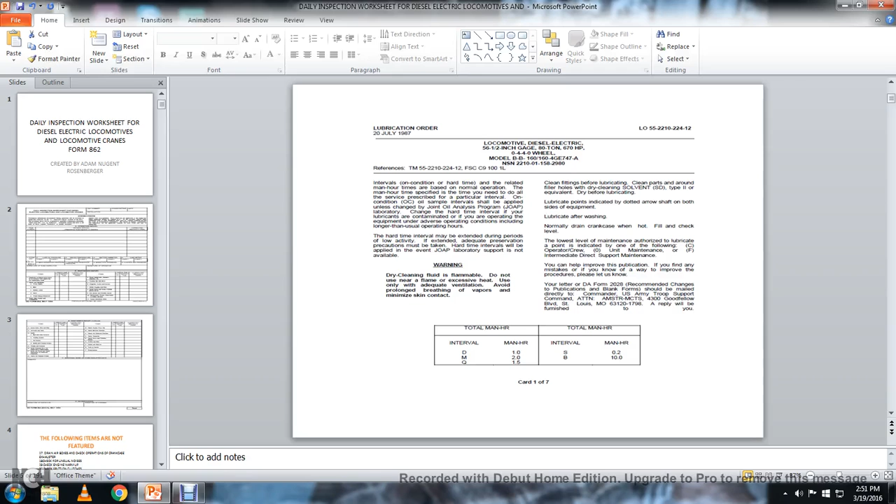This is a video for how to fill out a daily inspection worksheet for diesel electric locomotives and locomotive cranes, form 862. It covers the locomotive brake test, initial.

A 16 part process, a straight air brake test, and then some assembly drawings of the different items.

The daily inspection locomotive form has items: repairs needed, operator report, corrected, cleaned (yes or no), lube oil pressure number 1 and number 2, water temperature number 1 and number 2, battery ammeter number 1 and 2, load meter 1 and 2, main reservoir air pressure, equalizing reservoir pressure, brake pipe pressure, control air pressure, signature of road inspector, signature of operator.

Item 1 is lubrication complete, lubricating in accordance with the applicable DA lubrication order.

Number 2 is check and replenish water supply, fuel, battery, water, sand, and wheel flange lubricator, horns, bells, lights, and windshield, brake equipment, sanders and shutters, etc., cooling fan, couplers, locks, levers, brake rigging, pins, brake shoes, brake cylinders, piston travel, cab heater, standby heater.

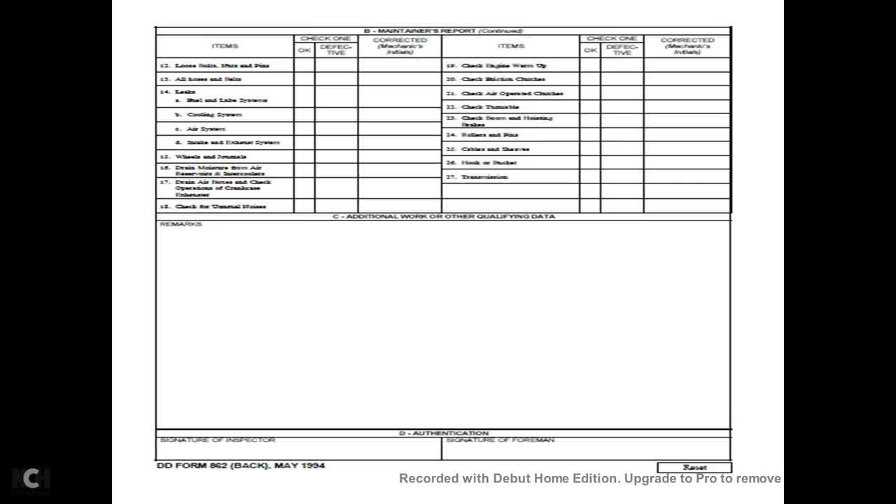Then over here are the more crane-specific items that I didn't do, such as check engine warm up, friction clutches, air operated clutches, turntable, boom, hoisting, rollers and pins and cables and sheaves and hooks and bucket and transmission for railroad crane.

Like I said, this is the daily inspection worksheet for diesel electric locomotives and locomotive cranes.

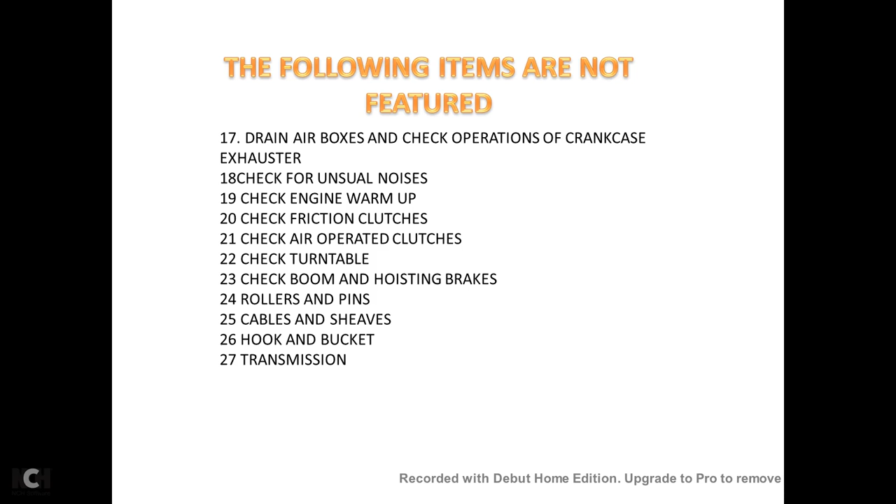Intervals are based on condition, hard time, and related man hours, based on normal operation of the hours specified, giving the time needed to do all prescribed particular intervals.

On condition, oil sample intervals are applied unless changed by the joint oil analysis program laboratory. Change hard time intervals if the lubricants are contaminated, or if operating the equipment under adverse operating conditions, including longer than usual operation hours.

The hard time interval may be exceeded during periods of low activity, and extended adequate preservation precautions must be taken. Hard time intervals will be applied when joint oil analysis program laboratory support is not available.

Warning: dry cleaning fluid is flammable. Do not use near a flame or excessive heat; use only with adequate ventilation. Avoid prolonged breathing of vapors and minimize skin contact.

Clean the fittings before lubricating, clean the parts around the filler holes with dry cleaning solvent type 2 or equivalent, and dry before lubricating.

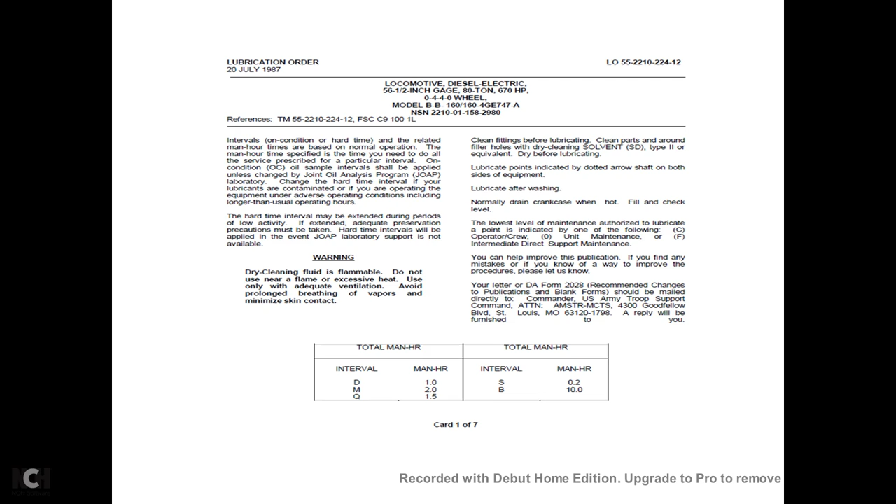D is 1.0 hours, M is 2.0 hours, Q is 1.5, S is two tenths of an hour, and B is 10 hours.

Starting with the engine oil dipstick and gauge, you check and maintain the high level for the first and check one each engine dipstick for each engine marked. The engine crankcase filler case is also shown on the OE/HDO. Add oil as needed to maintain the high level mark.

Number 3, the lower part says engine crankcase drain, one each engine. Open the drain valve and drain the oil. See notes 3, 4, and 5.

Engine oil filters, or drains and strainers. Oil filter replacement interval shall align with the condition of the joint oil analysis program, or hard time oil change requirements. See notes 4 and 5.

At the oil change, drain and clean the engine lube oil filters, strainer housing, sump pans, and interior crankcase, drain and dry parts, replace filter elements, replenish the oil supply with approximately 10.5 gallons of engine oil. OE/HDO, fill to the high level mark on the dipstick. Check the engine oil filters, valve covers, and filter strainer housing seals for tightness, start and run engines, replenishing oil supply to the high level mark.

Engine oil: a sample of the oil shall be sent to the Joint Oil Analysis Program for analysis at an interval of 25 hours or 30 days. Refer to AR 700-132 for sampling requirements of the Joint Oil Analysis Program.

JOAP Laboratory Support. If support is not available, drain and refill crankcase oil at every 500 hours.

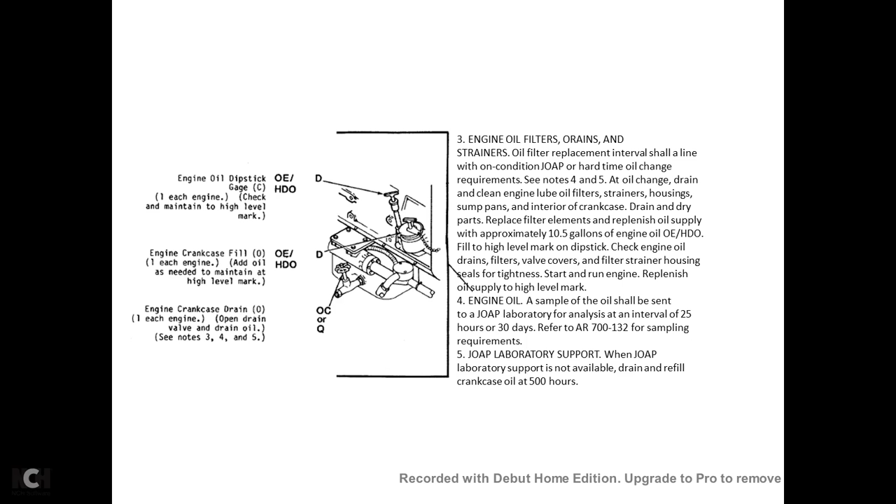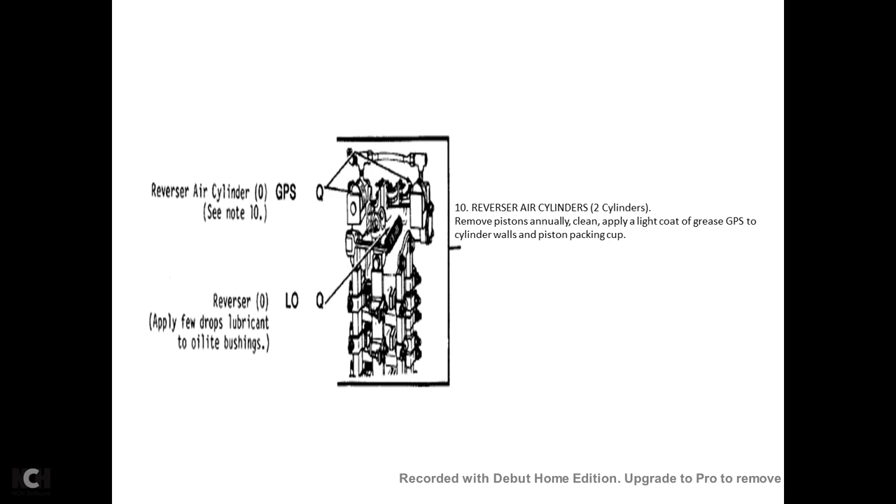This shows your reverser air cylinder, see note 10, and the reverser. Apply a few drops to the oilite bushings. Number 10, the reverser air cylinder: remove the piston and annually clean, apply a light coat of grease to the GPS, the cylinder walls, and piston packing cup. Now your battery terminals.

Clean off all the corrosion. Apply a light coat of grease.

Your truck center plate, one each truck. The truck center plate, when condition of the graphite lubrication indicates, replace lubricator.

This is where the oil dipstick, the crankcase filler, and the crankcase drain is to your left, and the reverser air falls to the right. The reverser air cylinder, the reverser, the battery terminals, and the truck center plate.

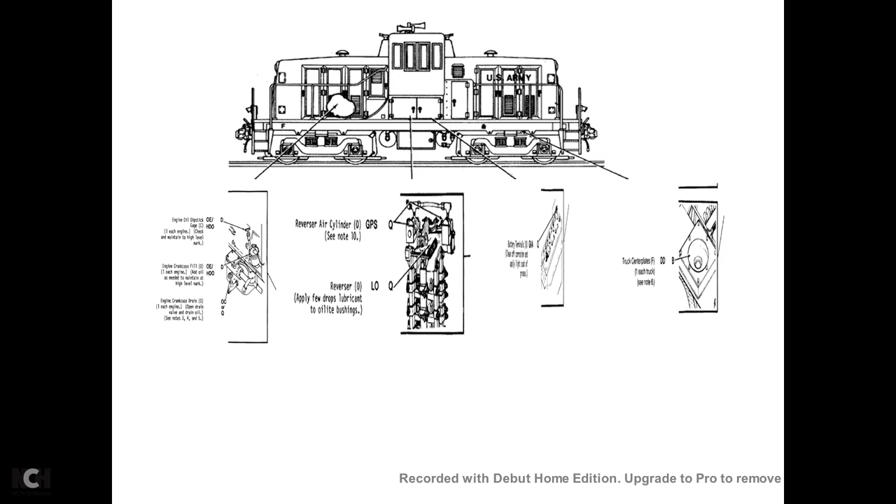This is your brake slack adjuster, 4 fittings for each truck. Apply a few drops to exposed threads.

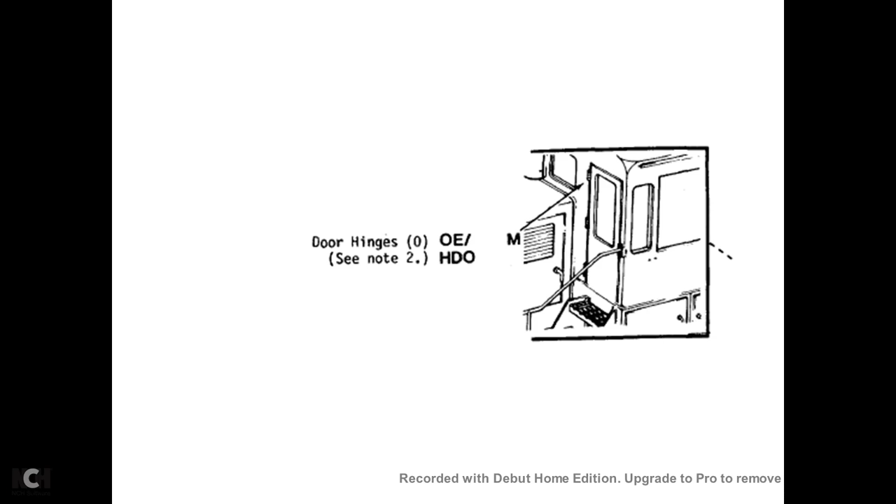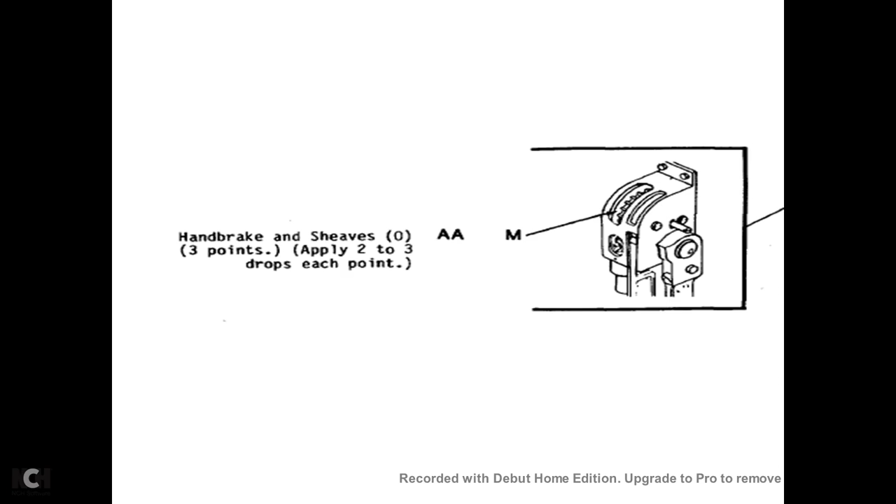The door hinges also need to be oiled, see note 2. Handbrake chain roll guide: apply to the handbrake chain roll, 2 to 3 drops each point. Handbrake sheaves: apply 2 to 3 drops each point.

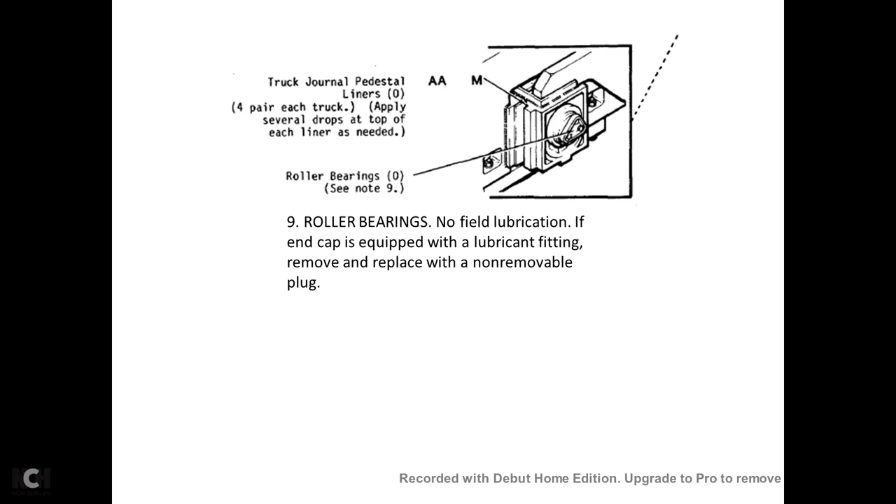Truck journal pedestal liners: apply 4 pair each truck, apply several drops at the top of each liner as needed. Roller bearings: no field lubrication. If the end cap is equipped with a lubricating fitting, remove and replace with a non-removable plug.

Your engine oil filter has two each engine, see note 3. Engine oil filters, drains, and strainers: oil filter replacement shall align with on-condition under the Joint Oil Analysis Program, or hard time oil change requirements. See notes 4 and 5 at the oil change drain.

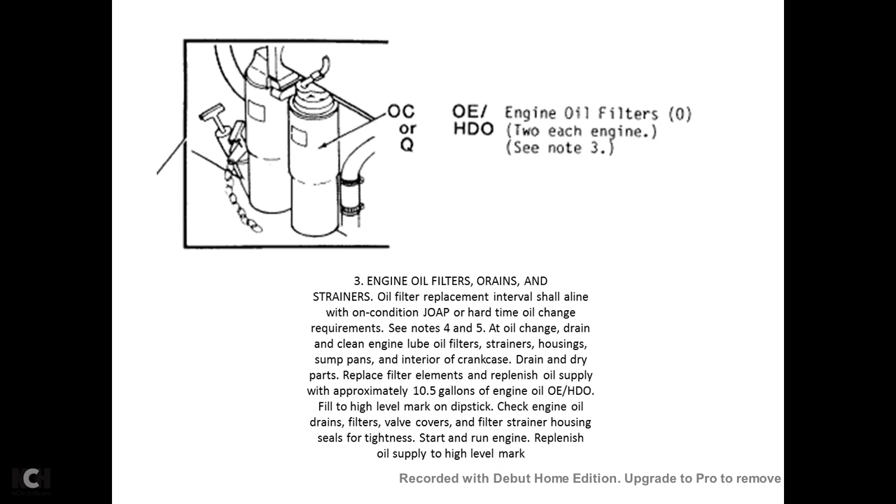Clean the engine oil lubrication strainers, housing, sump pans, and interior crankcases, drain dry, replace parts and filter elements, replenish oil supply with approximately 10.5 gallons of engine oil, OE or HDO, fill to the high level mark on the dipstick. Check the engine oil drain filters, valve covers, and filter strainer housing seals for tightness. Start and run the engine, replenish the oil supply to the high level mark.

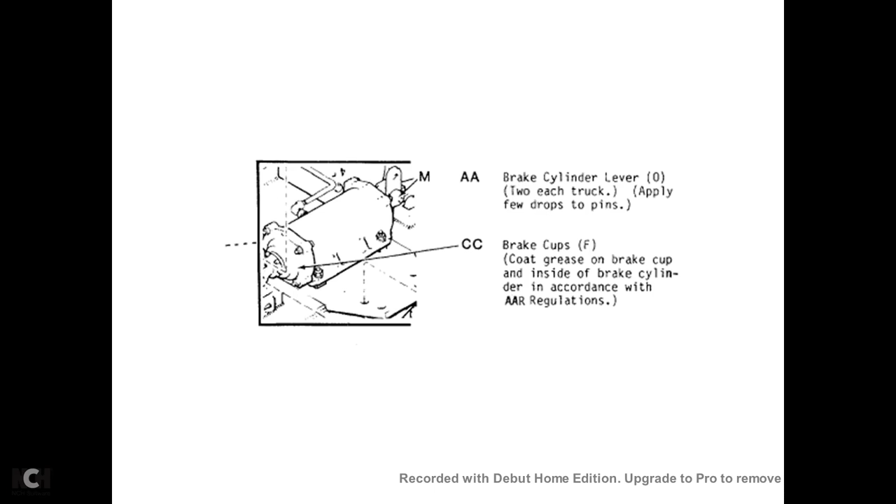Your brake rigging: apply a few drops to the pins and bushings. Brake cylinder lever: apply a few drops to the pin. The CC brake cups: coat the brake grease on the brake cup inside the brake cylinder in accordance with AAR regulations.

Your coupler, carrier, and striker, one on each end: apply a light coat of grease as needed. GAA knuckle pin locking head and pin: light coat of grease as needed.

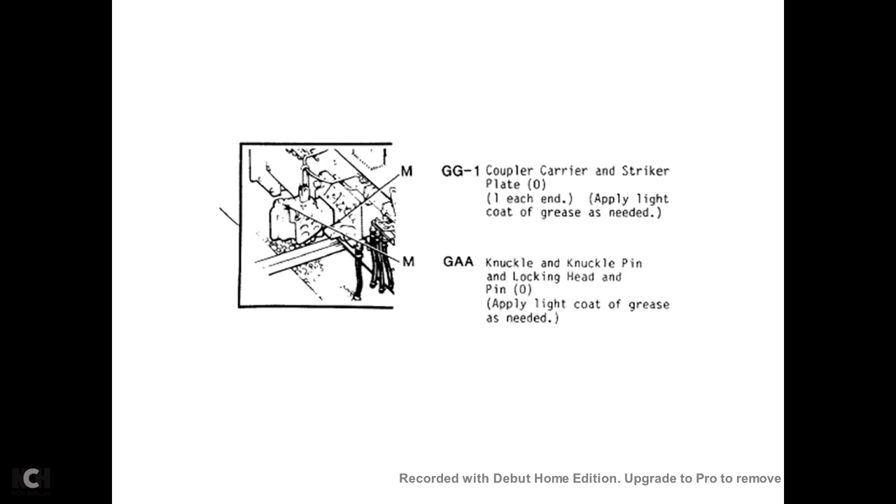Here's a picture of a bell ringer. Apply a few drops to the fulcrum pin.

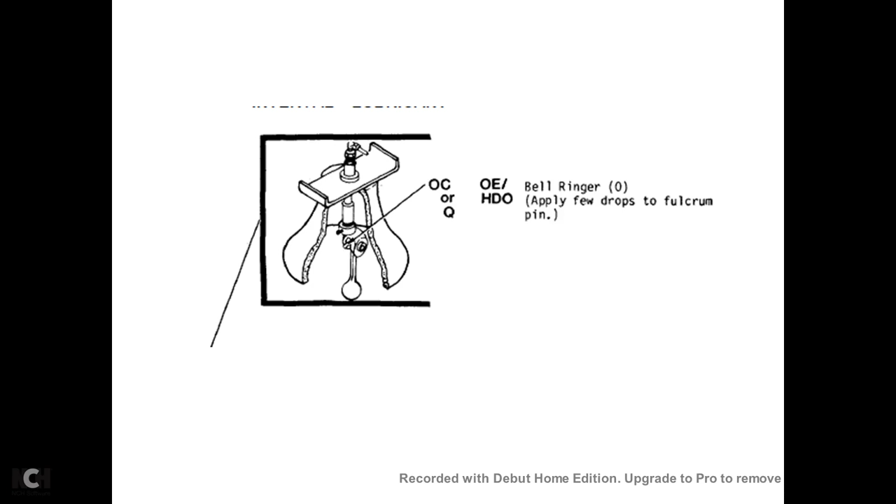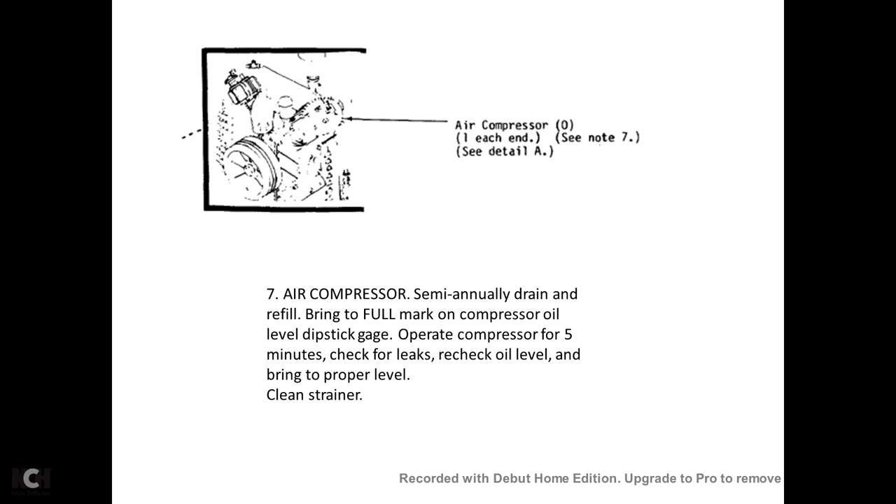Air compressor, one each end, see note 7. Air compressor semi-annual: drain, refill, bring to the full mark on the compressor oil level dipstick gauge, operate compressor 5 minutes, check for leaks, recheck oil level and bring to the proper level, and clean the strainer.

Your main generator armature bearing, one generator each end, 1 point: apply 1 to 2 pumps from the grease gun.

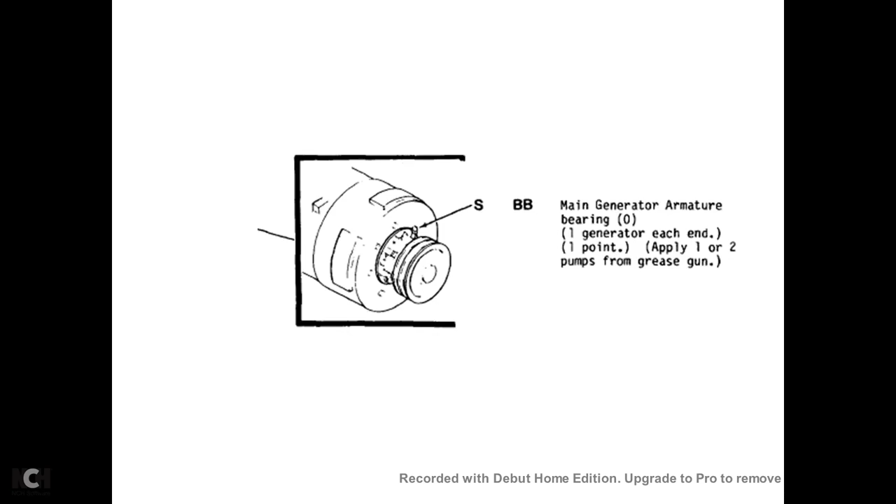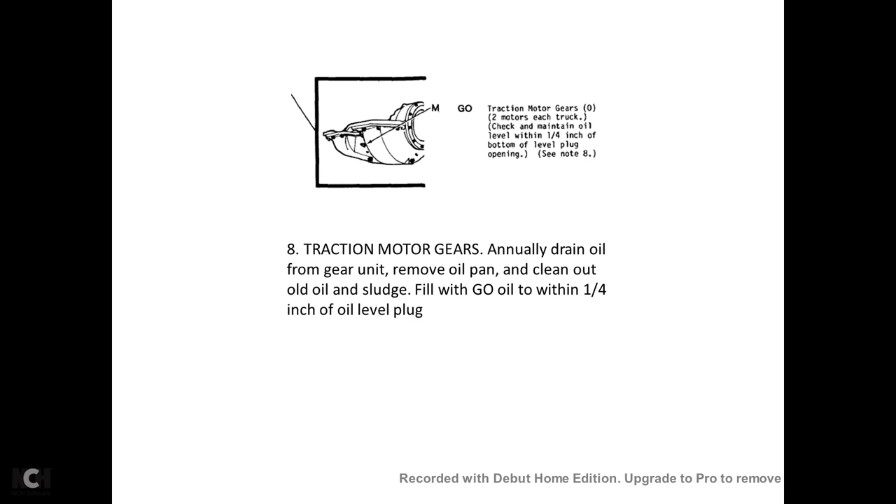Your traction motor gears, there should be 2 motors for each truck, checking and maintaining oil level within 1/4 inch from the bottom of the level plug opening. Your traction motor gears, annually drain oil from gear unit, remove oil pan and clean out old oil and sludge, fill with GO oil to 1/4 inch of oil level at the plug.

The M stands for the air intake. Remove, clean, and immerse in oil, drain excess, install crankcase cover plate, add oil and change. Remove, clean pump screen and sludge from the plate, replace plate, crankcase, drain and refill to the correct level. Then from the lubrication interval: crankcase breather, remove, clean and replace oil filter, and as needed maintain oil level.

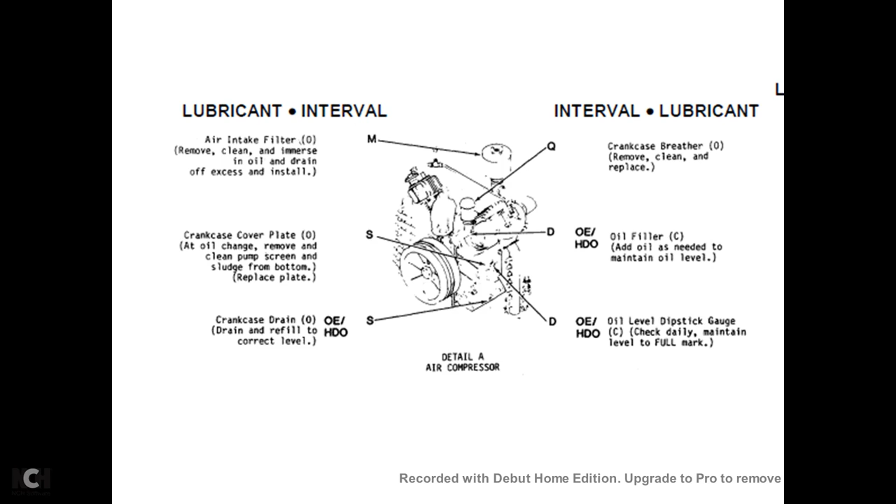OE/HDO oil level dipstick gauge, check daily, maintain level at the full mark. Your lubrications are OE/HDO lubricating engine oil and crankcase at 10.5 gallons, air compressor at 7.5 quarts.

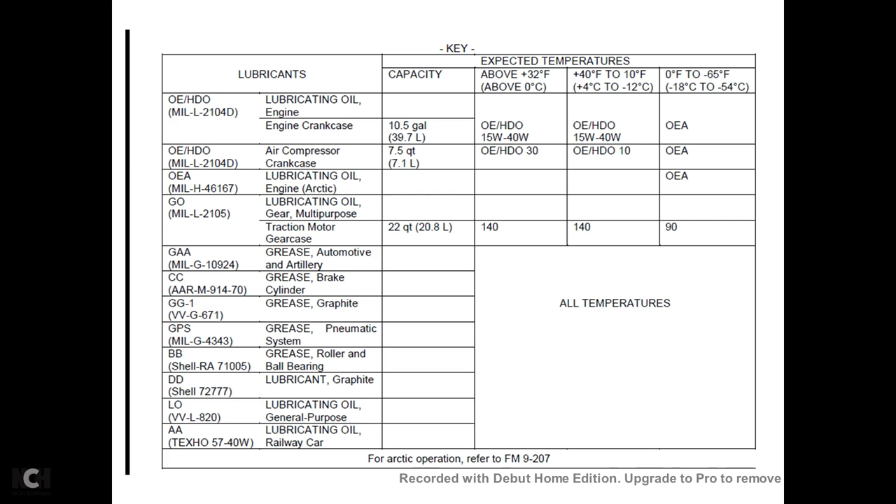Your intervals are given in normal operation: daily at 10 hours, monthly at 100 hours, quarterly at 3 months or 250 hours, semi-annually at 6 months or 500 hours, annually at 12 months or 1,000 hours, biennially at 24 months or 2,000 hours.

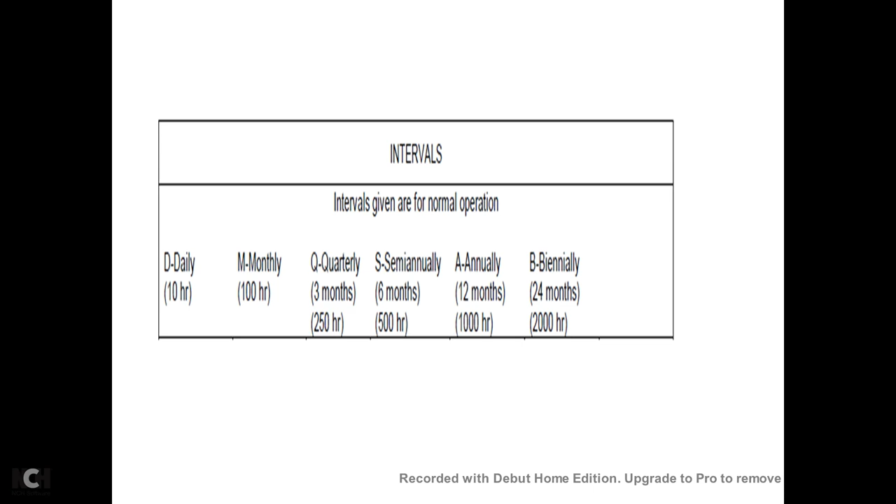Once again, we're going to go over all the notes for operating the equipment in protracted cold temperatures below negative 40 degrees Fahrenheit. Remove the lubrication prescribed in the key if the temperature is above negative 4 degrees. Please clean the parts with dry-cleaning solvent, lubricating with the lubrication specified in the key for temperatures of 0 to negative 65 degrees Fahrenheit.

2. Oil can points, monthly, lubricate all hinges, latches, pins, clevises, springs and exposed threaded surfaces with OE/HDO oil, except as otherwise required for the other lubrication shown on the charts.

3. Engine oil filters, drains and strainers. Oil filter replacement intervals shall be aligned with the on-condition joint oil analysis program. Hard time oil change requirements, see notes 4 and 5. The oil change, drain and cleaning of engine oil filters, strainer housing, and sump, interior crankcase drain, dry parts of the replacement filter elements, replenishing the oil supply at approximately 10.5 gallons engine oil.

OE/HDO, high level mark on the dipstick, checking the engine oil drains, filters, valve covers, the filter, strainer housing and seals for tightness, starting and running the engine, and replenishing the oil supply to the high level mark on the engine oil dipstick.

A sample of the oil shall be sent to the joint oil analysis program for analysis at intervals of 25 hours or 30 days, or as directed, refer to AR 700-132 for the sampling requirements, in case the joint oil analysis program laboratory support is not available.

Drain and refill the crankcase oil at 500 hours. The truck center plate, when conditioned, graphite lubrication indicated, replace the lubricator.

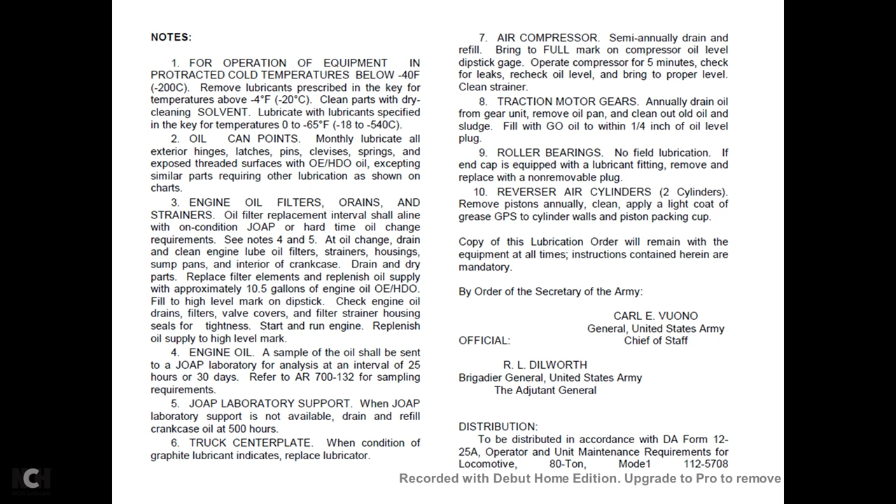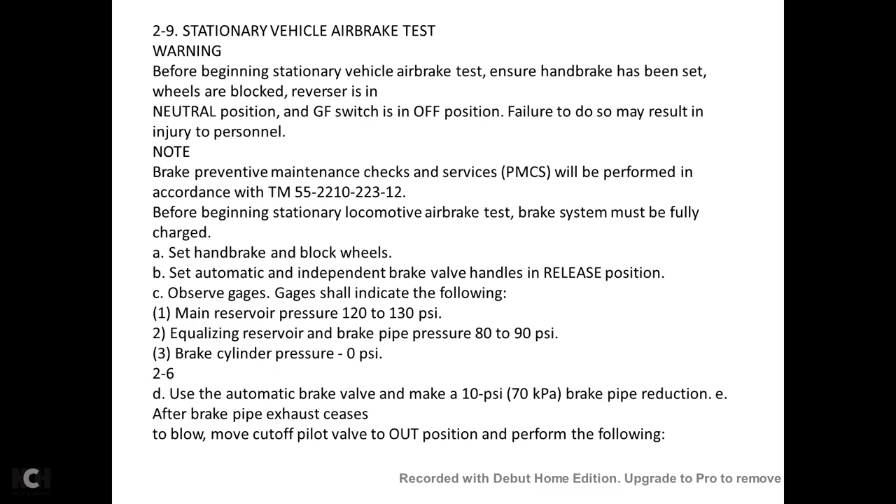5708. All right, moving on. We're going to do a stationary brake test. I'm going to cut the video and do a couple of different parts.